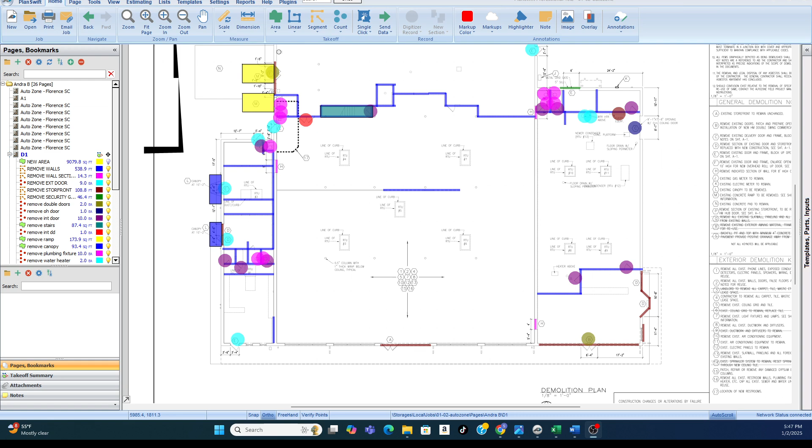Okay, so let's review this AutoZone. Very complicated. A lot of stuff that you're just going to have to account for that's not there right now and you'll have to make up in the end. Okay, anytime you see a demo plan and they give you something like this, it's not a good thing, and it's not. Chances are there's not a lot of good detail for you to base all of this on.

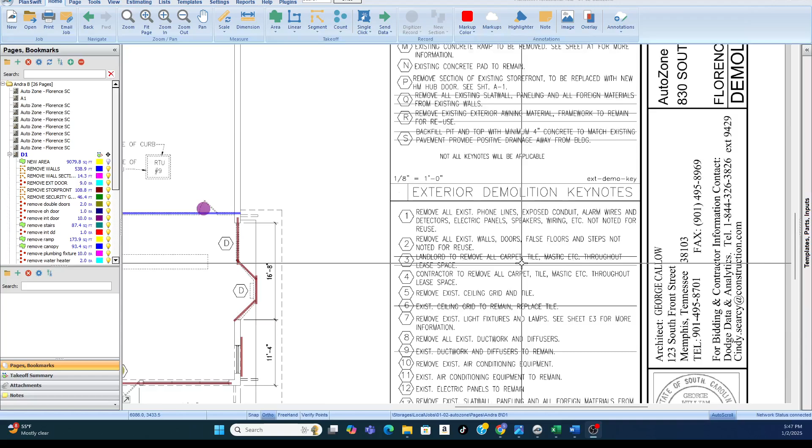And so, if we look at that, remove all existing phone lines. That's number one. Conduit, alarms, wires, detectors, electric panels, speakers, wiring, etc. Not noted for reuse. Well, there's nothing here, nothing to count from, nothing to make measurements from. And so, the best you can do is determine how many square feet, and that's just number one. Okay, and we can go on.

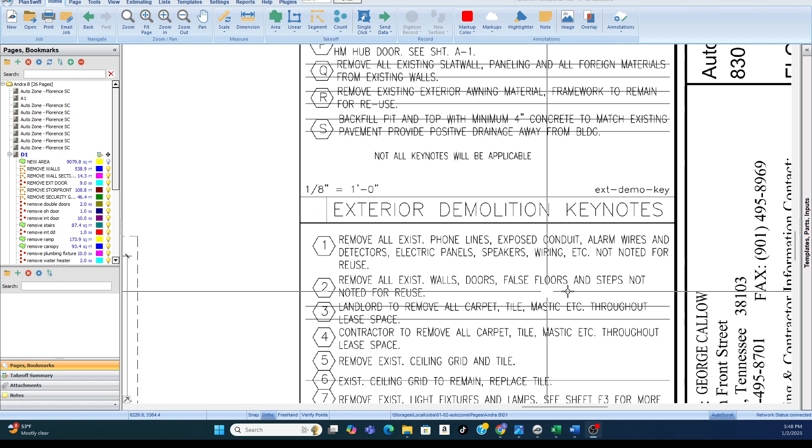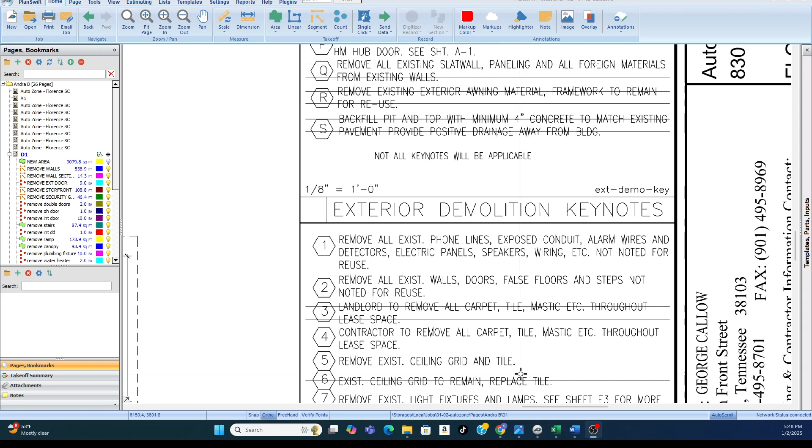Number two, remove all existing walls, doors, false floors, and steps, not noted. Okay, and four, remove all carpet, tile, mastic, etc. Remove ceiling grid and tile. So when we have something like this, when it's not very detailed, this is what I do. I will determine how many square feet for that area that they're talking about, and then begin to try to determine each one of those line items per square foot.

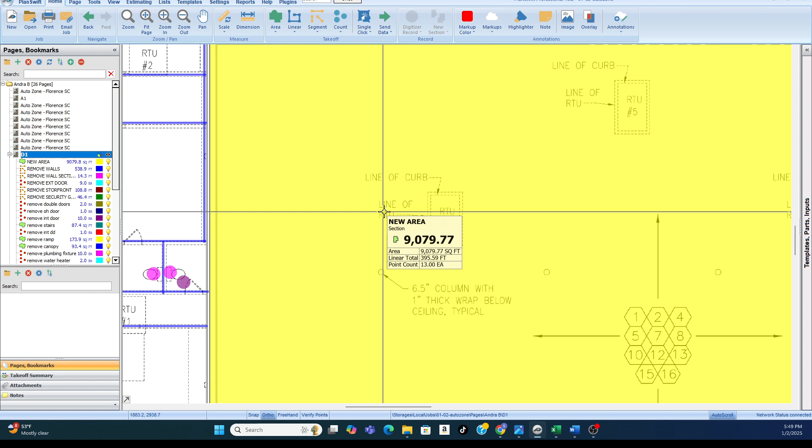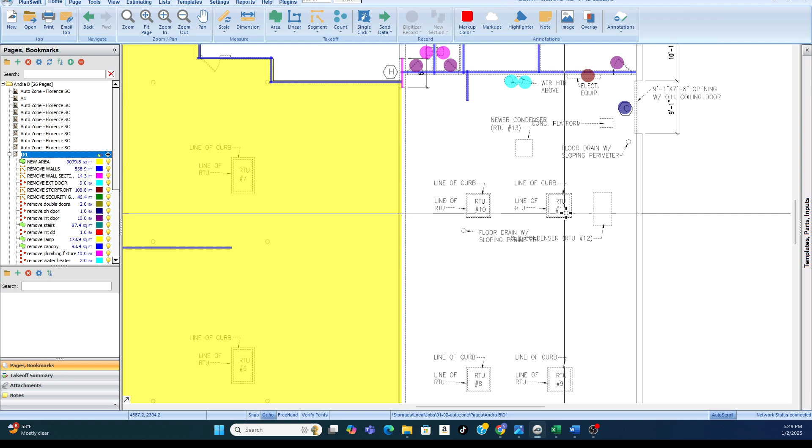Okay. And they give you items on the roof, the rooftop unit. I'm assuming the roof curb is being demolished, but there's nothing in the demo plan that says that. So there's nothing that I've accounted for in the takeoff referencing anything related to the rooftop units or the floor drains, even though the dotted line indicates demo. Okay, and so that's something I'd be checking out later.

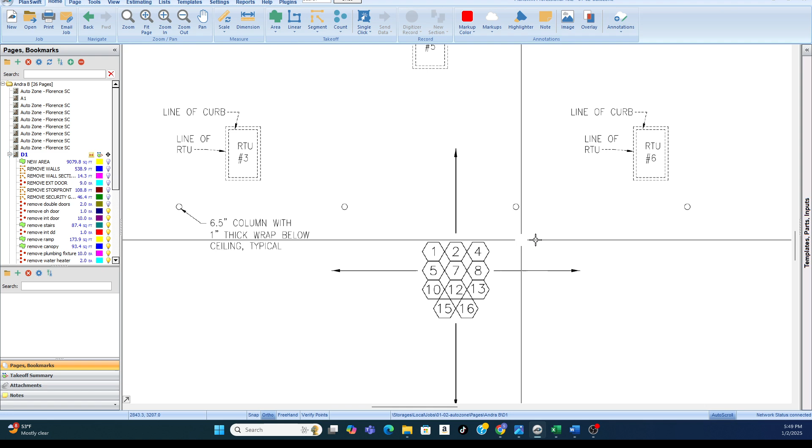Now, let's cut that off. This indicates to me that we're only talking about, and let me cut off all of, well, no, that's good enough right there, I think. Let's cut off more stuff. Okay, so when we talk about these keynotes, I'm assuming that we're only talking about the area enclosed to this point. Let's cut that off, the stairs off. All of the area enclosed up until this point. Not all of this at all.

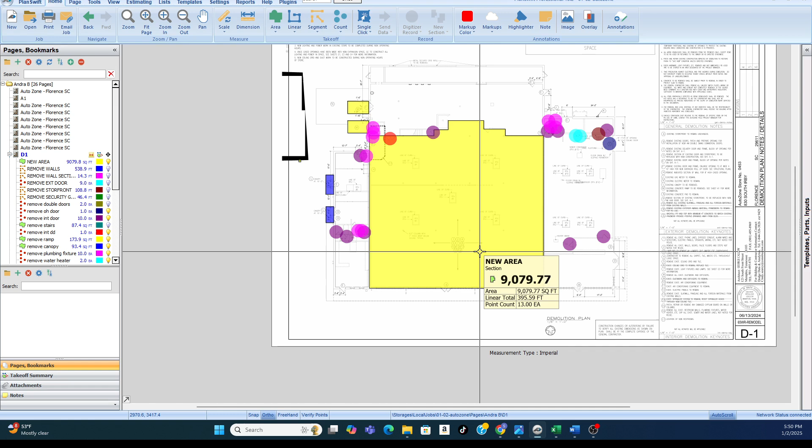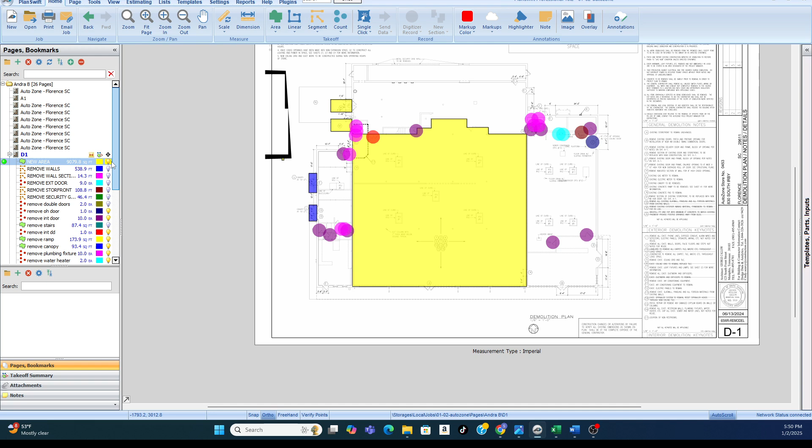Okay, and so when I did that, I assume this area only because if this was intended to be the whole area, it would be here and here, or it would be here, indicating it's this whole area and this area. But because it wasn't, just assume that everything in these notes are for this area only, and then everything else, the takeoff was broken down individually.

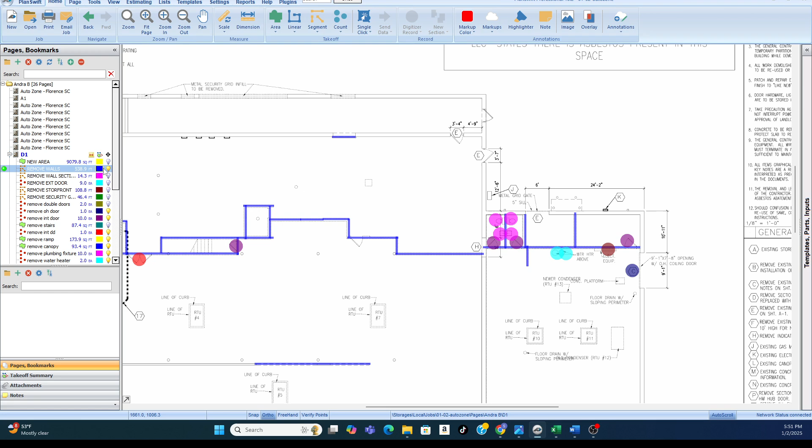So, how many linear feet of wall, the stairs, all of this area, everything outside of that area that was clear, grids, security gate infill, everything. And the full takeoff will be included, including all exterior doors that were demoed, exterior double doors, portions of the exterior wall that was opened or broken into, removed along some portions of the perimeter.

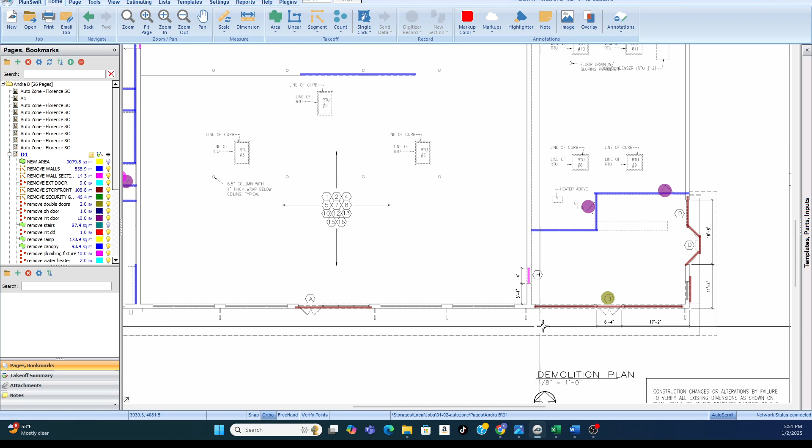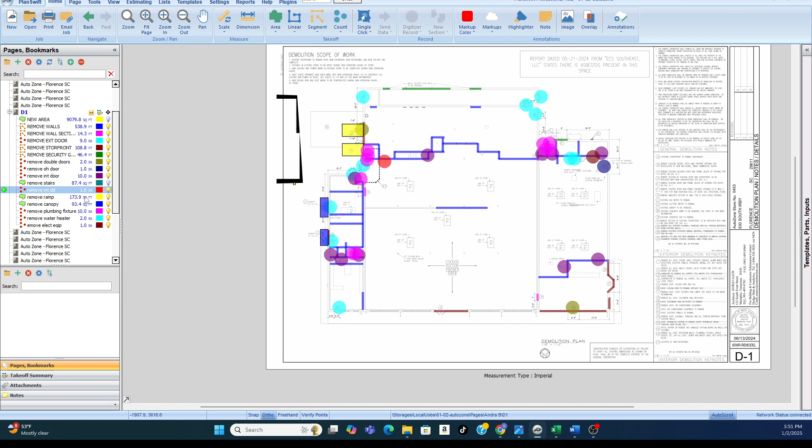And so, what was not included, again, all of the HVAC unit information, okay, and any of these keynotes, we didn't apply that to any area outside of this main area. And I think that's it as far as this. And then full takeoff, 539 pretty much linear feet of wall to be removed.

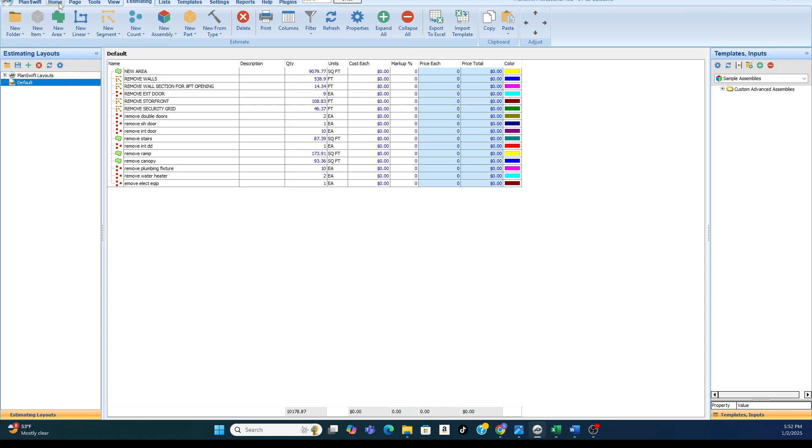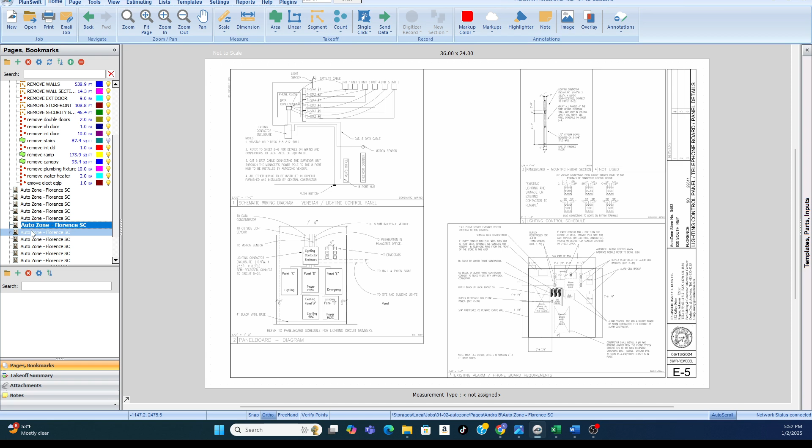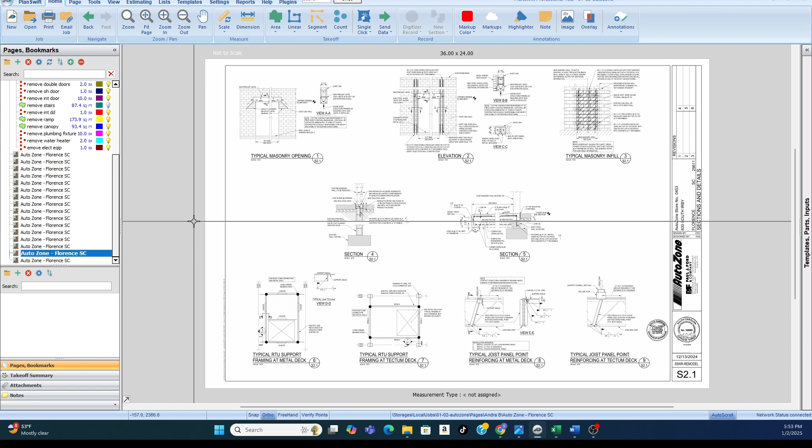And we can assume that that wall, because we're not given any section views for the demo, but we can go from section views from the architectural set if we have it to determine the height the wall would have been. Let's go through it, see if we can find a section view. But I always give it at least, we're all the way to the electrical set. Doubt there will be. I just give it 10 linear feet for the purpose of the estimate, 10 linear feet. And then we can compare that to the actual property, the actual lengths when we do a walkthrough after we present and win based on our takeoff.